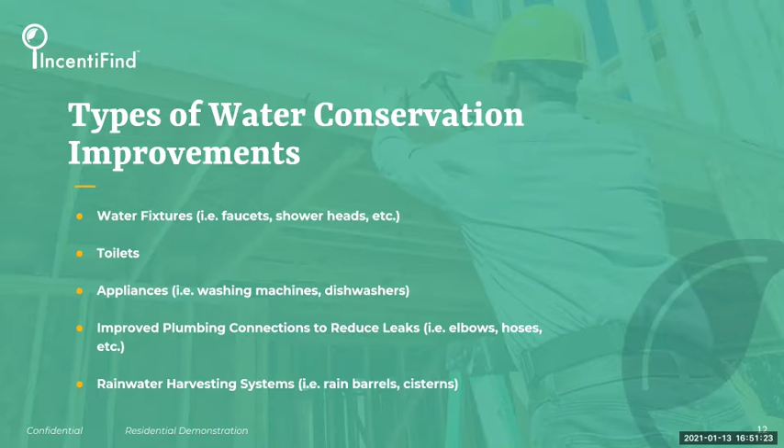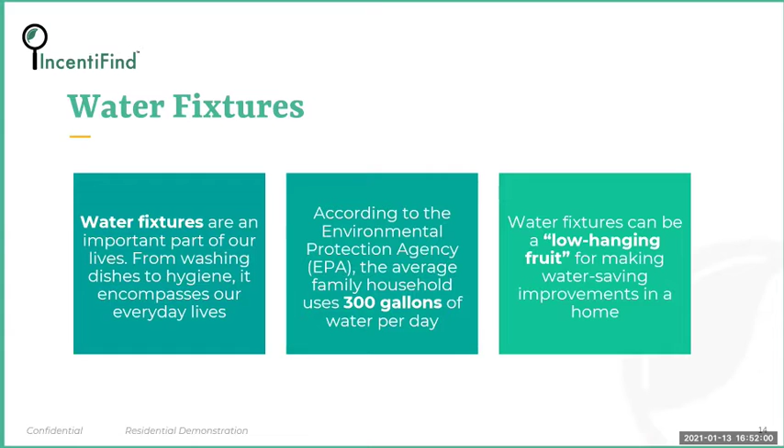All right, so on to the first type of improvement, which could be a water fixture type project. Water fixtures are very important to our lives, from washing our dishes to everyday hygiene, this is something that encompasses our lives every single day. And according to the Environmental Protection Agency, or the EPA for short, the average family household is going to use 300 gallons of water per day when using these kinds of fixtures. Water fixtures then can be that low-hanging fruit for making water-saving improvements inside of a home.

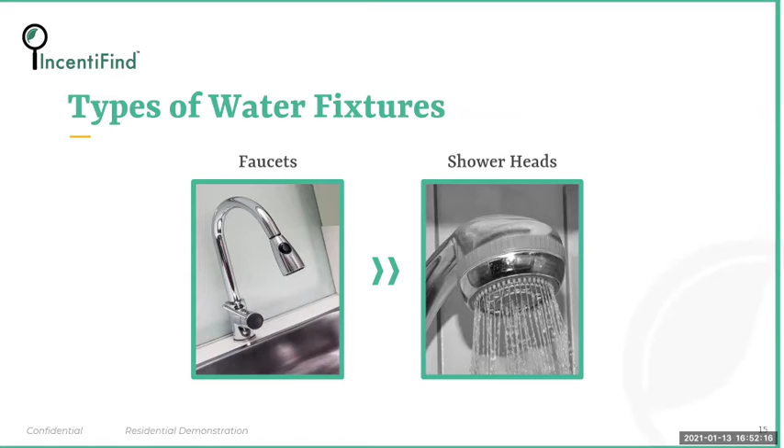And as I've mentioned, the types of water fixtures that could be replaced to help reduce how much water consumption a property owner uses could be faucets in their sink, shower heads inside of their shower spaces. So let me go with some calculations here about what could look like a typical fixture that you could be putting in your property, and what kind of usage that can possibly look like for an average household utilizing those particular fixtures.

So let's start with a faucet. A typical water usage rating for a faucet for any kind of home that's maybe 20 to 30 years old could be 3 gallons per minute. That's what GPM stands for. For a shower head, the typical water usage rating could be 5.3 gallons per minute.

So let's say, for example, with a faucet, you've used it 10 minutes per person per day, and say you have 3 people inside of your home. That could equate to, just by using your faucets every day, 90 gallons of water used with this typical water usage rating on the faucet that I just mentioned.

Then say on the shower head, maybe the time a person takes a shower on average could be around 15 minutes per day per person. And then you have the 3 people in your home, multiply all that together, and you could be looking at almost 239 gallons of water per day on a shower head that has the typical water usage rating I was just mentioning before as well.

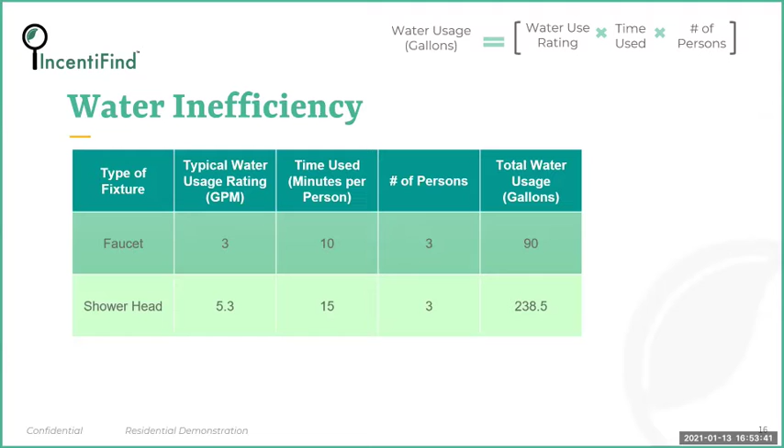Let's say we change out those fixtures as part of a retrofit project that could help with water conservation. Say we have a faucet, and now you put in one with a more efficient water use rating of only 1 gallon per minute. Using the same calculations as before, used 10 minutes per day per person, 3 people in the home, you've now reduced water consumption for faucets to 30 gallons per day.

Then on that same shower head, say you change it where now it has a usage rating of only 2 gallons per minute. Keeping the same amount of time that person is in the shower, and multiplying by how many people do that, you're looking at an average of 90 gallons of water used for showers in an average home.

So when you put it all together, this is a tremendous amount of savings. The difference between the typical water usage in a faucet versus the efficient usage in my example could lead to savings of 60 gallons of water on average per day. With the shower head, going from the typical usage rating to a more efficient one, you'll save close to 149 gallons of water on average per day, which can ultimately lead to a 208.5 gallon water usage savings from those particular improvements.

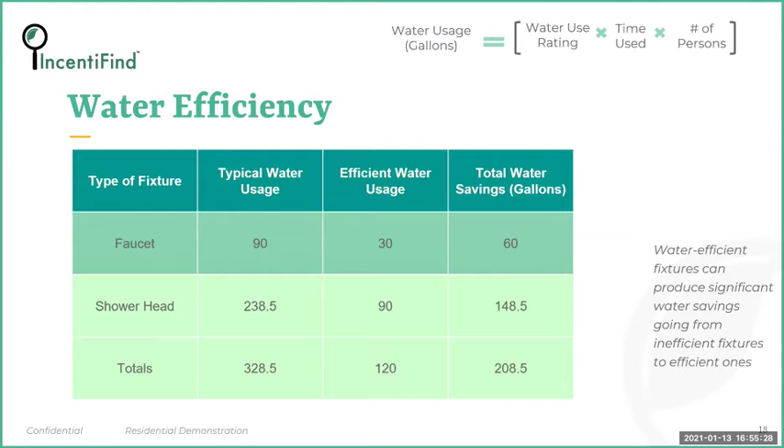So it's very clear and obvious that water efficient fixtures can produce significant water savings when you go from inefficient fixtures to more efficient ones that you might install.

There are different types of incentive programs out there in different territories. For example, in Los Angeles you can get free faucet aerators and shower heads for water district customers in that area. Or in Atlanta, you might get a free replacement of fixtures such as a tub, shower, or bathroom sinks, for senior citizens around the Fulton County and Atlanta metro area. So that's incenting people to make those improvements and basically pay no money for the installation of those fixtures.

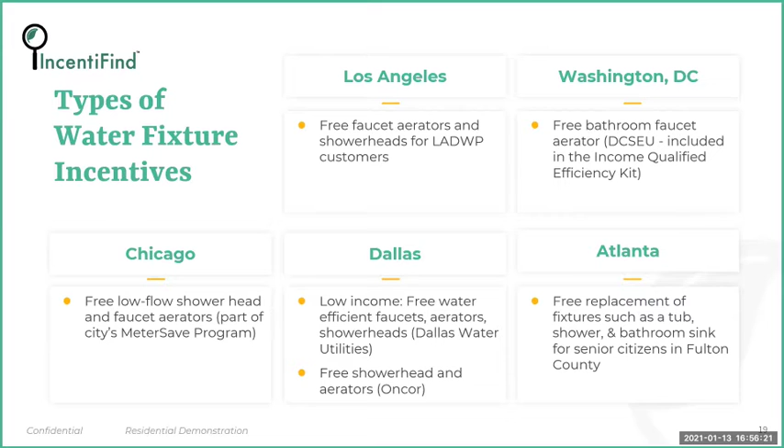All right, so on to our next type of improvement, which can be with the toilet that you have in your home.

Toilets are a very important part of our households, for obvious reasons. According to the EPA, on average 30% of indoor water usage can be attributed to toilet usage each day. So almost a third of our water usage comes from every single time we flush our toilets each day, which is a tremendous amount of usage for a household on average.

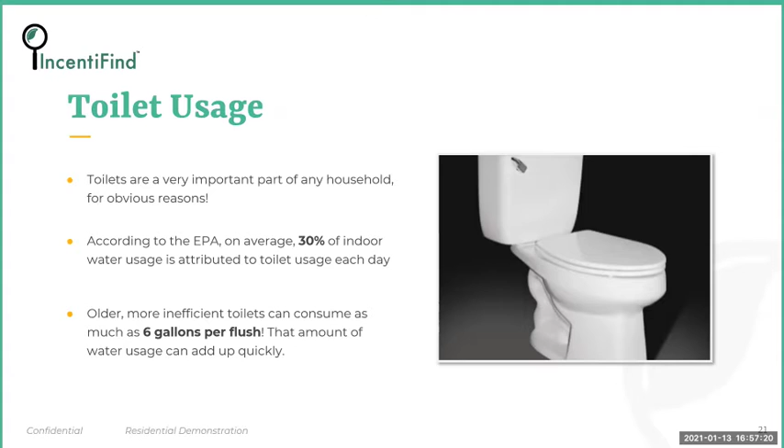These older, more inefficient toilets can consume as much as 6 gallons per flush. Think about that, 6 gallons per flush going down each time you flush. Doing that each time amounts to water usage that can really add up quickly for a homeowner and increase their potential water costs.

In terms of the types of toilets you could be installing, we can go from the standard toilet to what is a more water efficient toilet. A unique difference between each toilet is that the standard toilet has only one flush function. You have the standard handle that you press down and it just gives you that one kind of flush.

On a more water efficient toilet, you might notice on the top there are usually 2 different types of buttons you can press. If you press one of those buttons, that could be for liquid waste. But if you're going to do solid waste, you would press down 2 buttons to be able to flush and get more water to go down so you don't stuff your toilet every time. That lets you distinguish between the types of waste, so that especially for liquid waste, you don't have to use all that water. It just might require a smaller amount of water to do a flush each time.

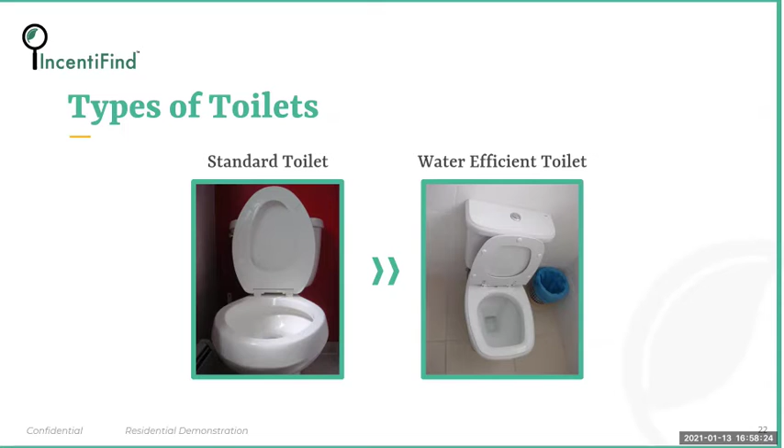Let me go through some examples of how water efficiency can factor in when we're looking at typical toilets versus water efficient toilets. Say on a standard toilet we see maybe 7 gallons of water used per flush, and let's say there are about 5 flushes a day per person, with 3 people in that household. That could add up right away to 105 gallons of water used on average per day just by flushing toilets in an average household.

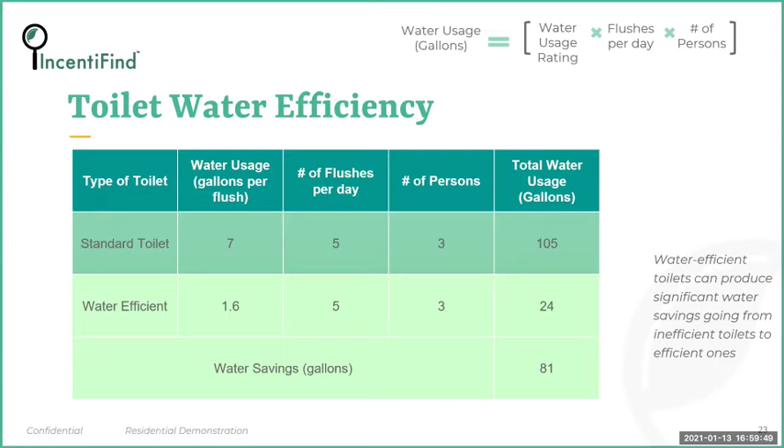But if we install a water efficient toilet rated at only about 1.6 gallons per flush, with the same average of 5 flushes per day and 3 people in the house, that would go down to only 24 gallons on average per day. The total water savings between the standard toilet and the water efficient toilet ends up being 81 gallons per day on average. That shows you can make a pretty significant change in how much water you use, which leads to bettering the environment and reducing cost to the homeowner who's got to pay those water bills.

So just some other examples of incentives that could be out there to pay for water saving improvements like a toilet. In Chicago, they have a free toilet tank bank and toilet flapper programs, and other improvements that can help reduce water consumption when you flush your toilet. In Dallas, for low-income homeowners, they provide up to 2 free high-efficiency toilets in the Dallas water utility area, so homeowners can get the benefits of reducing their water consumption. That's just a couple examples of the different incentives for being able to install water saving improvements.

Now let's talk about different kinds of appliances that could be more water efficient and how you can get incentives for that. Appliances inside a home can represent a good portion of water usage. According to the EPA, the average household use of these types of appliances is 22%, say for clothes washers as an example. That shows it's a pretty heavy water user at any given point when you have to do your laundry. To a lesser extent, dishwashers use much less water, but they can still be a good contributor to indoor water usage if used very often. So if you have a big family constantly running a dishwasher, that water usage is certainly going to add up alongside the use of a clothes washer inside your home.

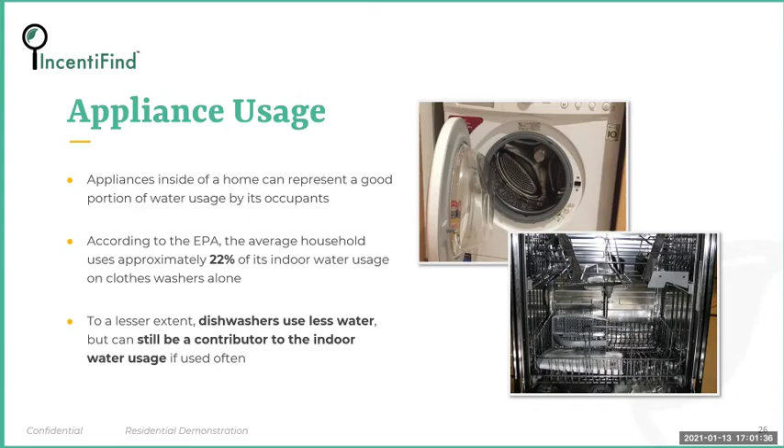There are certainly some rebate programs that Washington D.C. and Chicago offer. Los Angeles also has improvement programs through their energy saving program, which can include a clothes washer replacement for free. That could give energy savings, but also leads to a reduction in water consumption for that homeowner.

How about plumbing connections then? Plumbing connections inside our homes are more important than we realize because they're always providing consistent and uninterrupted water usage. Failures in maintaining that plumbing system can lead to leaks that go undetected until you open up your next water bill.

I was emphasizing that point earlier, that leaks are certainly crucial to keep under control, because if you don't detect them, the only way you're going to find out you have a leaking problem is when you discover a much higher water bill than anticipated. It's very important to do the basics of this maintenance so you don't have that unexpected bill coming into your mailbox.

The EPA says households across the country could waste 1 trillion gallons of water each year just from undetected indoor water leaks. This is a tremendous loss in a crucial natural resource that's getting scarcer by the day. So the more homeowners can do to reduce leaks inside their homes, the better, to help conserve water as a critical natural resource.

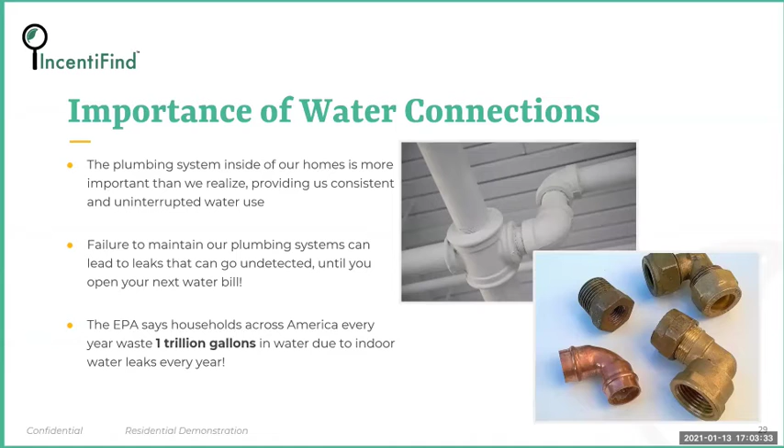There are some examples of different incentive programs. For example, you can get a bill credit in Atlanta, which will reimburse you for all the water leak repairs you make. They would actually just credit you right back on the bill itself.

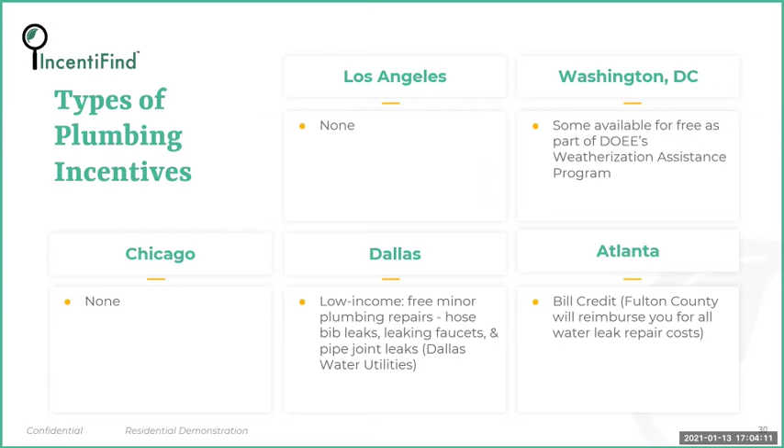In Washington, D.C., they actually have some of these available for free if you make use of the weatherization assistance program that Washington, D.C. runs. So again, there's some examples of how you can go about getting some of these costs repaid, whether on bill or off bill in this case.

Lastly, when we're talking about rainwater harvesting, we have the ability to use sensors as well as harvesting type improvements that basically use that water for watering your lawn and plants, so you're not tapping into your actual utility water through sprinklers or other irrigation systems installed around your property.

If you have the ability to capture that rainwater, it can be used at a future time to water your plants, shrubbery, and grass, which helps reduce how much you have to use municipal or utility water services. There are different kinds of these harvesting type systems that can get rebates in Los Angeles, for example.

Looks like you can do it in Chicago, and certainly in Atlanta as well. Again, you have these free rain barrel type systems or just rebates to help defray the cost to a property owner.

So what kind of improvements could include a water efficiency type project? We think all three of these types of improvement projects could involve a water saving opportunity - whether doing a general home renovation, a gut rehabilitation down to the studs because they're doing a major repurposing of space to make it more modern, or ground up new construction.

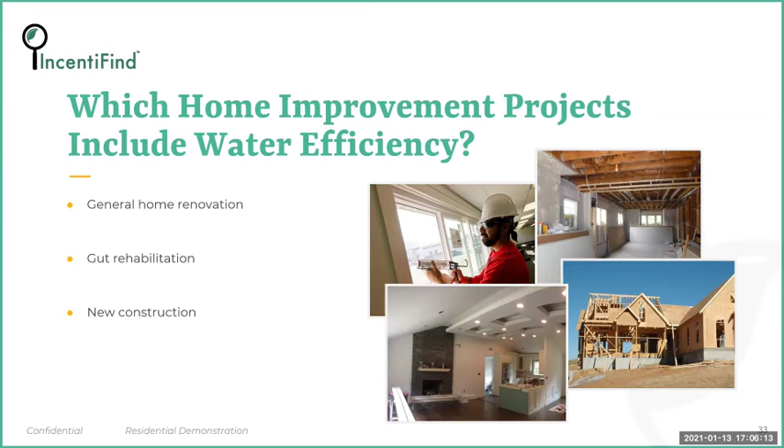You're going to find ways to make a property modern, having the latest and greatest fixtures and technologies in place to help you reduce your water consumption inside that home.

We have a case study example if we just focus on Los Angeles for a moment. We look at where, if you were to do all these different types of improvements, what could you get from incentive programs that are managed and administered within the Los Angeles area?

For water fixtures, you'll have the ability to get free faucet aerators and shower heads. If you put in a water efficient toilet, you'll be able to get access to a $40 rebate for each premium high efficiency toilet.

For appliances, you'll get one rebate per customer ranging anywhere from as low as $85 to up to $400 for putting in a new high efficiency clothes washer, as well as potentially getting a free clothes washer replacement if you're part of an energy savings assistance program.

They don't offer any kind of incentives for plumbing connections, but if you did a rainwater harvesting system, you'll be able to get water smart rebates through the Southern California water utility, where you can get a rebate on rain barrels as low as $35 but upwards of $70, and then a cistern rebate as low as $250 or as high as $350. Again, water conservation incentives are available for any of these kinds of home upgrades.

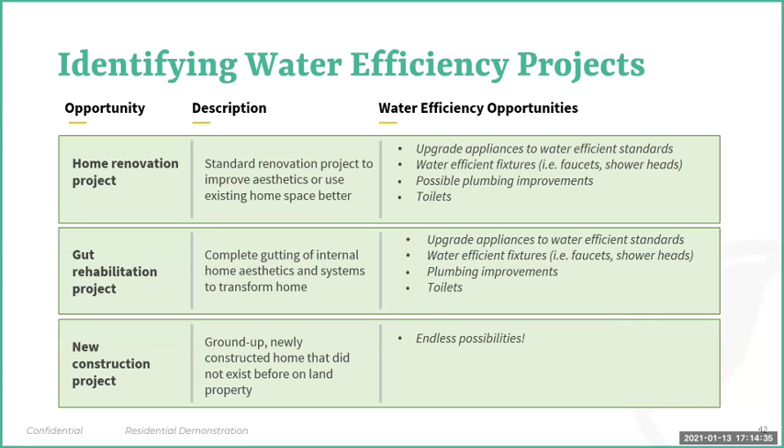So if you encounter any of those kinds of projects, and they may not list any of those water efficiency type improvements, don't assume they're not looking for those opportunities. That's why you get the chance to educate them with the knowledge and understanding we just went through today, to demonstrate that the project could incorporate water efficiency principles into it. And if you tell them about it, you could be piquing their interest to pursue those improvements if they hadn't thought about it before.

All this together means you'll be becoming more of a subject matter expert, able to determine where the project opportunities are that could incorporate these kinds of improvements. And if you don't see it, you have the opportunity to educate them to incorporate those improvements into the project, which helps increase the size of that project and the size of the loan you might be able to provide them for their project.

Well, so that was today's webinar with respect to talking about water conservation. I hope that you found this to be educational and very helpful to you and your lending institution.